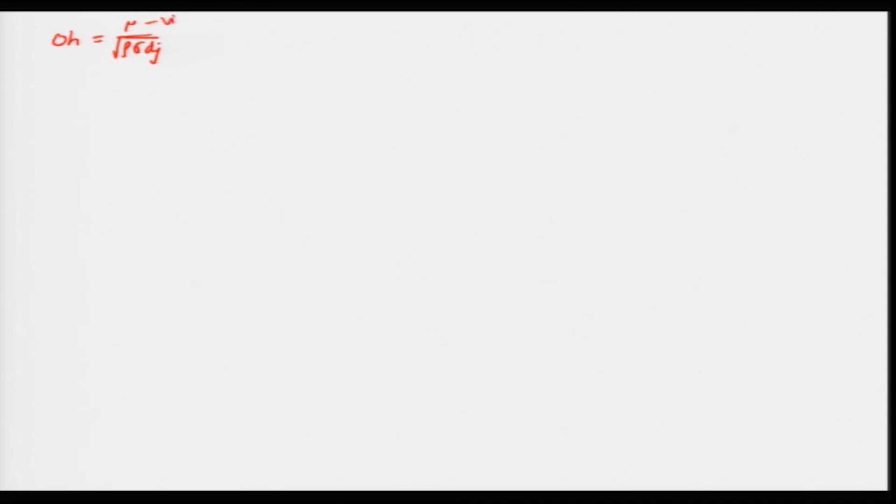We know that mu is the viscosity and rho is the density of the propellant, and sigma is the surface tension force, and dj is the diameter of the injector.

So, I can write this as mu over root over rho dj sigma, and I will multiply the numerator and denominator by root over rho dj, and I can also multiply by v here and v here. And this term and this term together will be rho vj, the velocity of the jet, so rho vj dj by mu, and I can write here root over rho dj v squared divided by sigma.

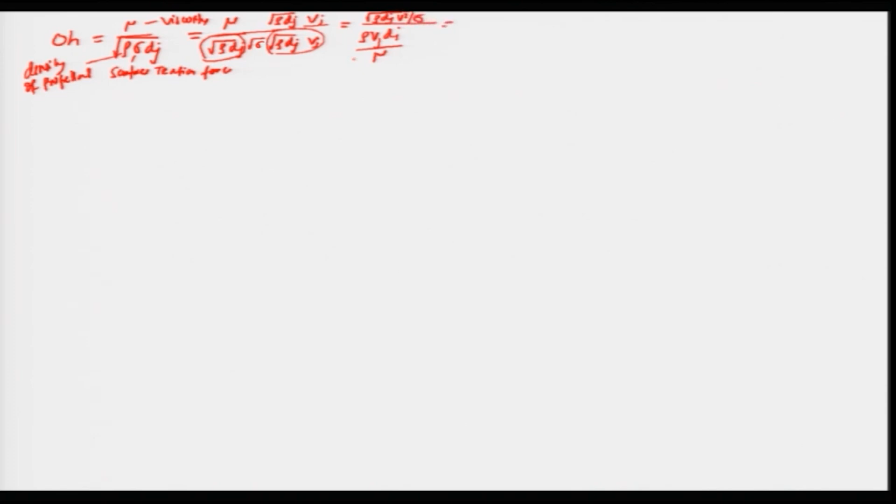If you recognize this, this is nothing but your Re j, and this numerator is nothing but your Weber number. So, the Ohnesorge number is the root over of the Weber number divided by the Reynolds number of the jet, and this is also known as the stability number, because it will indicate the extent of instability that is occurring in the liquid sheet or the liquid jet.

The Ohnesorge number will be indicating the ratio of the viscous force over the inertia force and surface tension. When the Ohnesorge number is higher, it indicates the viscosity effect is more.

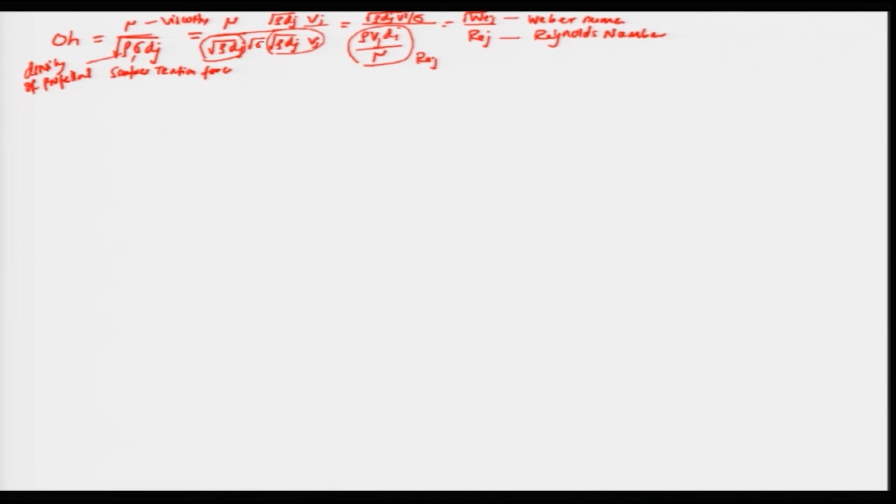We will be looking at it a little later on, how this can be related with the Reynolds number, and a higher Ohnesorge number means a greater influence of viscosity during the atomization.

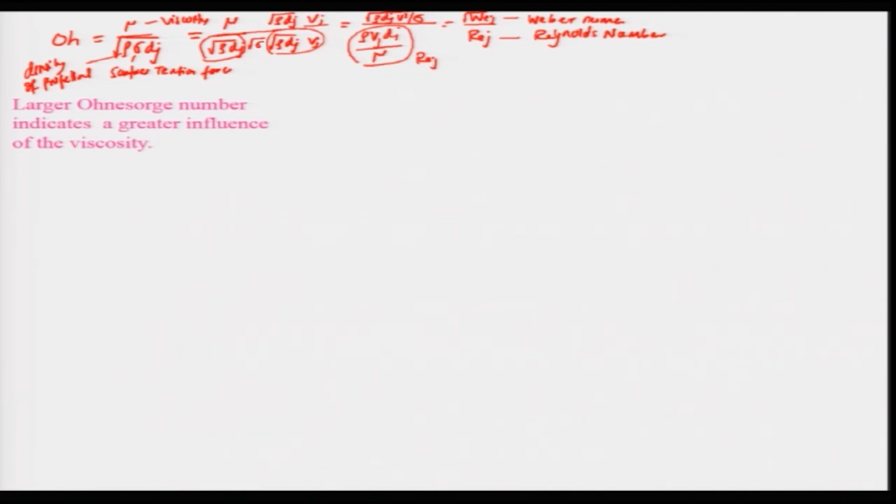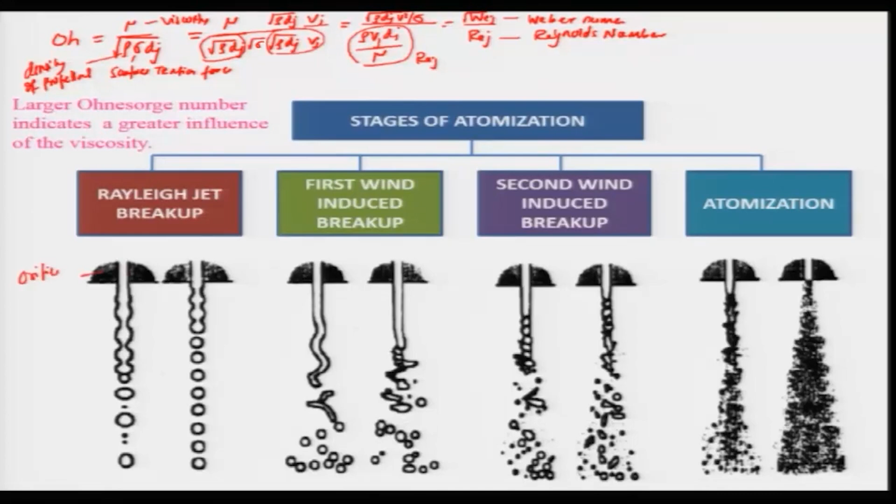So, in order to illustrate the importance of Reynolds number and also the Ohnesorge number, we will be looking at an example and look at what is happening to the atomization. We will be looking at what is really happening during the process of disintegration of a liquid jet, considering a simple jet. So, if you consider this is a simple orifice, this is an orifice having diameter dj, the diameter of the orifice.

And keep in mind that there will be some liquid pressure applied here, and that will be forcing the liquid to pass through. And as a result, the velocity also will be decided by the diameter of the jet. As the pressure increases, the velocity will be increasing, and so also the Reynolds number. This is the very low Reynolds number flow, as we know Re is rho v dj by mu, for a particular propellant.

Now, if the pressure is not much, it will be just coming as a solid liquid jet, and after that it will be subjected to oscillations, and this is a varicose oscillation. And this is of course when it is subjected to a gravitational pull, as we had already seen, the liquid will be dripping out of the orifice.

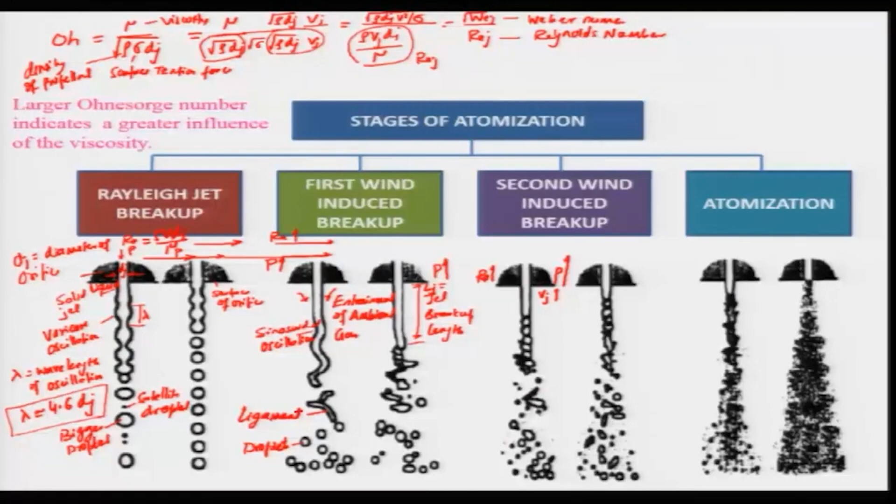And with further increase, similar things will be happening: this length Lj is being reduced, and then it will be subjected to oscillations, and then the ligaments are formed. And during this time, of course, smaller sizes will be coming, because secondary atomization will be playing a very important role here due to the induced wind velocity, and a lot of interaction will be taking place, so that a very wide range of droplets will be formed.

And when the pressure is increased further as compared to the wind induced breakup regime, then the jet breakup distance is also reduced further, and shearing of the liquid surface also starts. That means some of the ligaments are basically coming out of this, and then this will be again subjected to breakup, and secondary atomization will be predominant.

And when the pressure increases further, the atomization will start from the exit of the orifice itself. So, there is no distance in which a solid jet will be maintained, and in this case the primary atomization and secondary atomization will be very vigorous, and it will be starting from the very beginning.

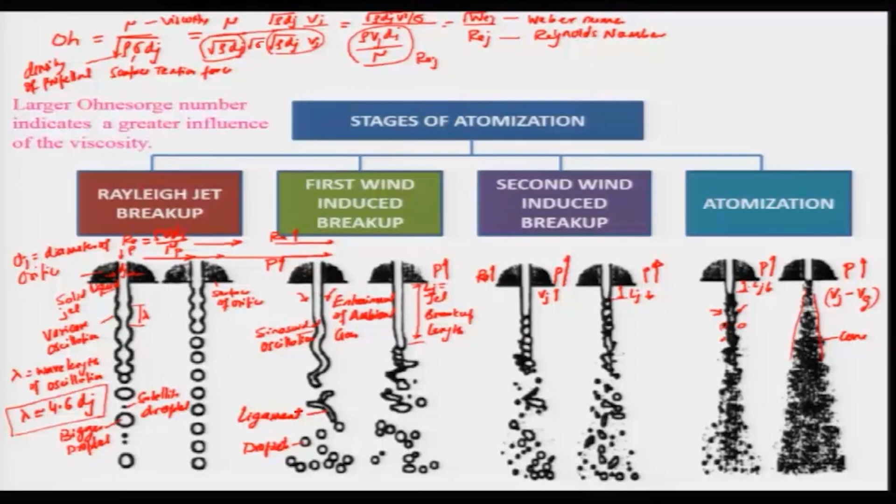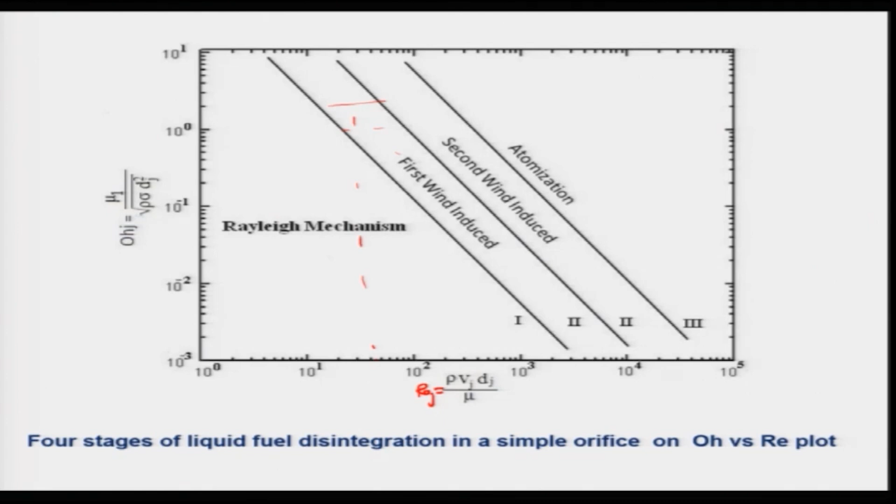So, we have seen 4 stages of liquid fuel disintegration from a simple orifice, and of course, one can go for a more complex one, but keep in mind that we use a simple orifice in rocket engines, and we will also be using other methods of enhancing the atomization process in rocket engines. So, the question arises, what are the basic methods of atomization in injectors used in rocket engines?

We can classify into 2 categories. We use the pressure such that we will get a higher velocity through an orifice, and then that will be really forming the ligaments due to the shearing of the bulk liquid, and particularly at a high pressure atomization will be good.

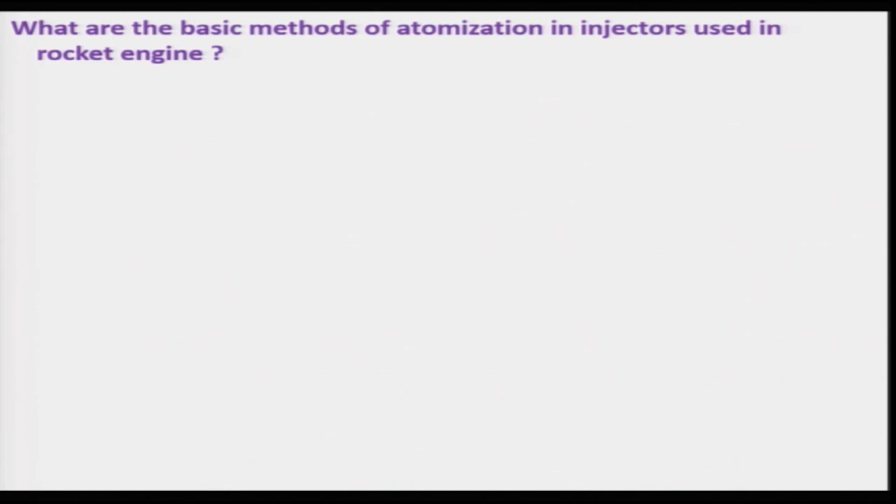But suppose you want to have a little lower pressure, but you want to have a better atomization. The other way is that you impinge the little low velocity liquid as compared to the non-impinging atomizer. So, therefore, we can broadly divide into 2 categories, one is non-impinging atomizer, other is impinging atomizer.

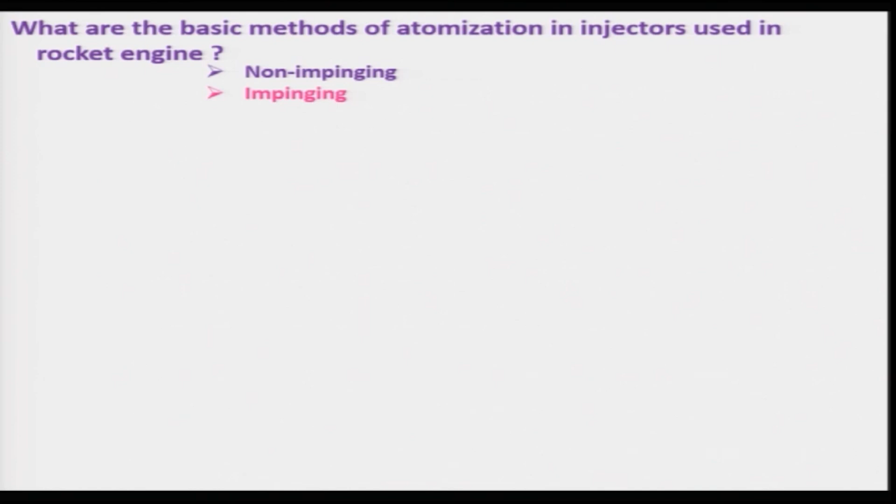In an impinging atomizer, liquid momentum is basically being used to advantage such that it can be broken directly without really undergoing the changes due to oscillations. Of course, the impinging may be leading to some certain oscillation of the process. So, question arises then, what are the processes that occur during impinging liquid jets?

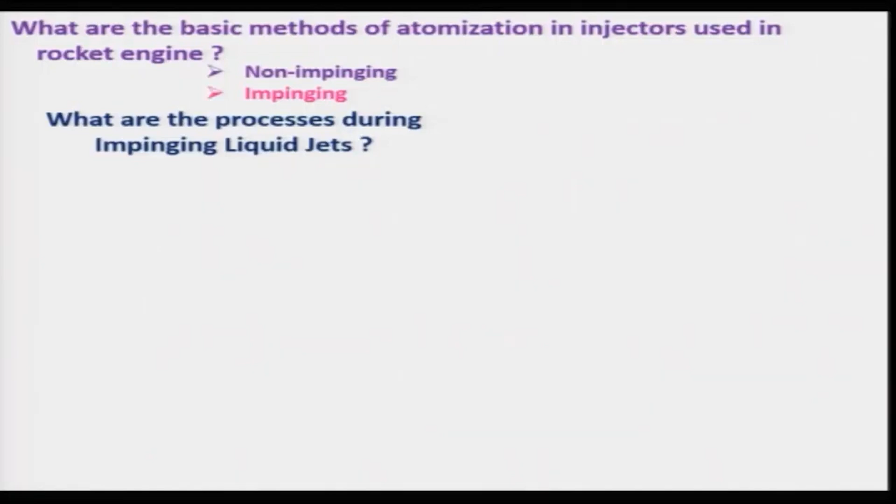Let us consider 2 liquid jets, A, which is shown here, and liquid jet B. One can be fuel, other can be oxidizer, or both can be either the oxidizer or fuel stream. So, when they are impinging on this point, this we call the impinging point.

And if you look at the pressure at this point, it will be very high, because the velocity will be coming to almost 0, and then the liquid will be trying to go down, provided that they are impinging with the same momentum. If there is a difference of momentum between the 2 liquid jets, then naturally it will not be in the same place, it may be swayed away depending on whose momentum is higher.

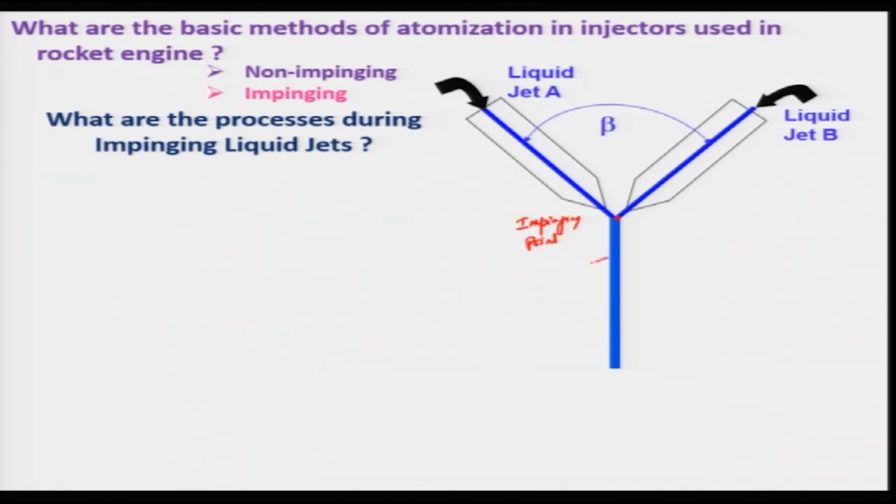Now, this is basically a liquid sheet, but you can't see it from here. When you look perpendicular to this, at the side view, you will be getting a flat sheet. As I told, this is a very high pressure zone here, and that will be dissipated, and because of that this liquid will be sheared and thinning down, and this we call a fan liquid sheet.

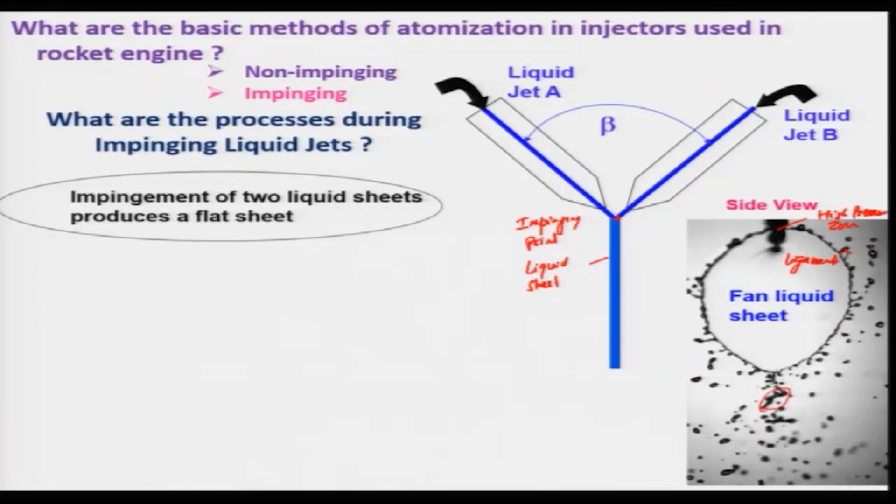And when this fan is formed, it will be shearing down towards the end till its momentum is dissipated. As a result, these ligaments will be separated out from this fan, and then these ligaments will undergo secondary atomization, maybe by impinging, colliding with each other or coalescing, and some ligaments are also formed here, and then smaller droplets. These are the droplets, and of course, these are ligaments.

This occurs in impinging atomizers, and this can lead to oscillation, because there will be some wave which I have not shown here. And the sheet formation can take place in various ways, and in the case of an impinging atomizer, the fan sheet is being used.

Whereas in the case of a non-impinging atomizer, let us say the liquid is coming out and there is an orifice here, the nozzle or orifice. Then a liquid cone can be coming out, provided it is being forced, or tangentially, or swirl is being imparted. So, this is basically conical sheets which will be formed, and then ligaments will be rippled out and threaded out. These threadings will occur, ligaments can be formed, and then droplets can be formed over here.

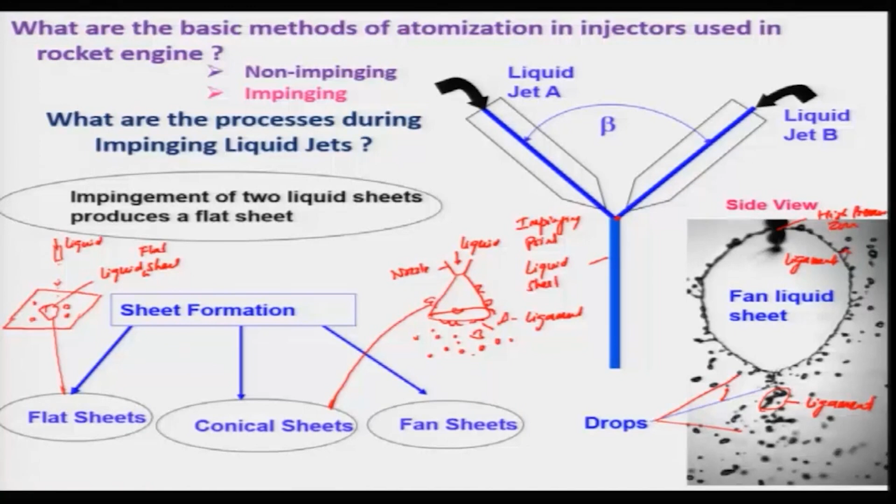So, therefore, this is the basic principle which we will be using, and in the next lecture we will be discussing the types of injectors which are being devised, and some of them. Thank you very much.